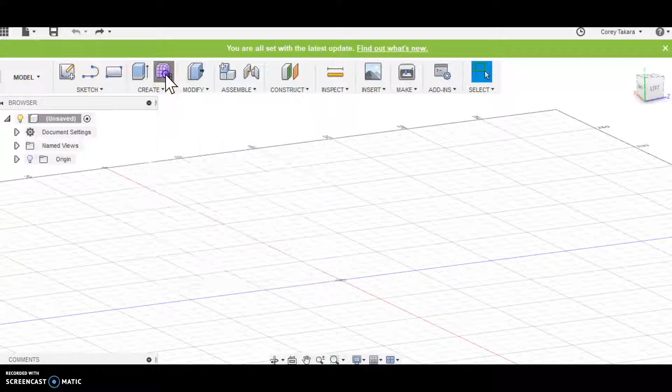Our first step is to go into create and create form, and it tells us we're entering the sculpt environment, and we say OK. And in the sculpt environment we're going to go up into create and we can choose box, plane, cylinder, sphere. There's different things we can start off with for our starting volume form. But we're going to pick box.

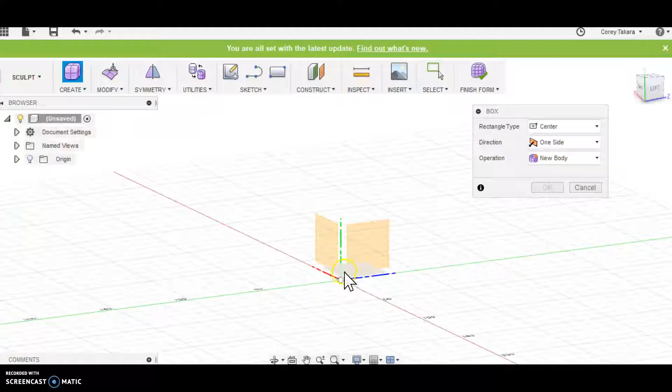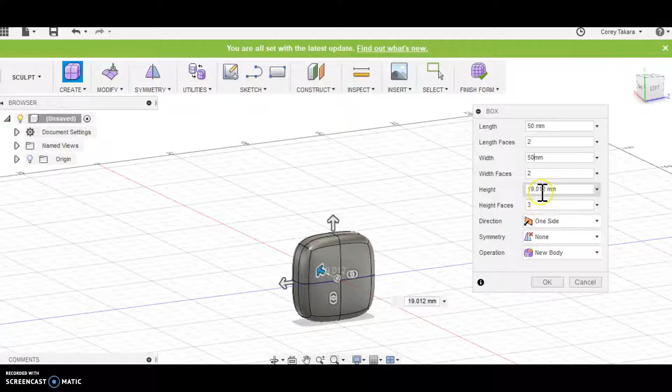And it's going to offer me 3 different planes to start from. I'm going to select the bottom plane. Actually, it looked like I selected the side plane, but that's okay. And now I have kind of this pillow-shaped form that I'm going to change the lengths on. I'm going to change the length to 50 millimeters, the width to 50, and the height also to 50.

And I'm going to give the height faces. Let's see, I'm going to give the width faces 2, the height. So you can just play around here in the box with the number of faces you have on each plane. So I'm just going to say OK.

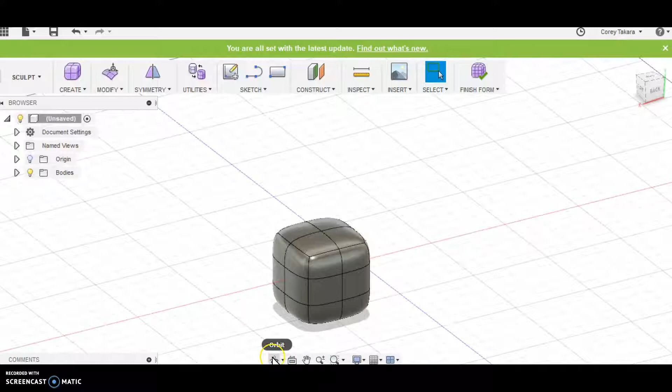All right, now I'm going to orbit, and I orbit by holding down the Shift key and pushing down on the roller ball on my mouse. If you do not have a roller ball on your mouse, you can always go down here at the bottom and select the orbit tool, and you can orbit.

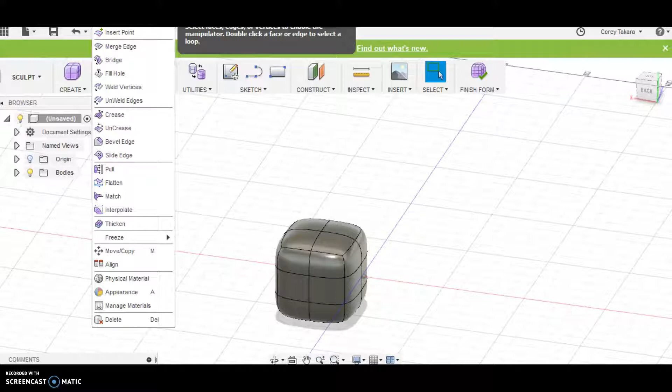The next step is we're going to distort this form and make it more organic. So I'm going to go back into modify. I'm going to click on the actual text modify. At the very top I can scroll upwards and select edit form. It doesn't show up in this screencast here. It's beyond the bounding box, but it says edit form.

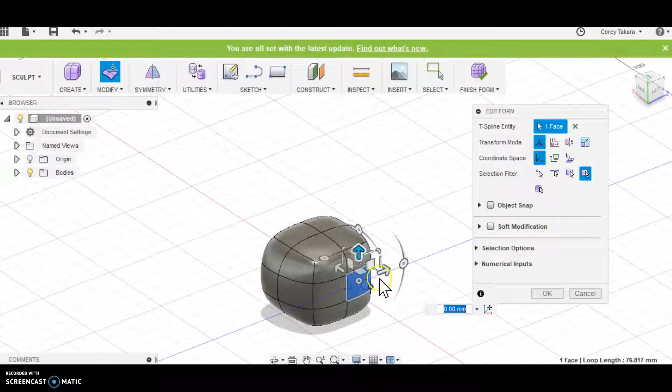And now I can select a face, and when I do that, it gives me 3 arrows. And what those arrows enable me to do is to push forward and back in the X, Y, or Z axes. So I'm going to select different faces and I'm going to push them out, and I'm going to orbit holding the Shift key while I push on the roller ball. And I can also roll outward to change my view to zoom in or zoom out.

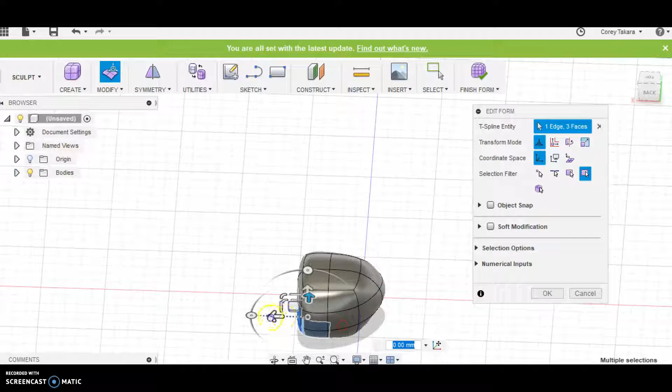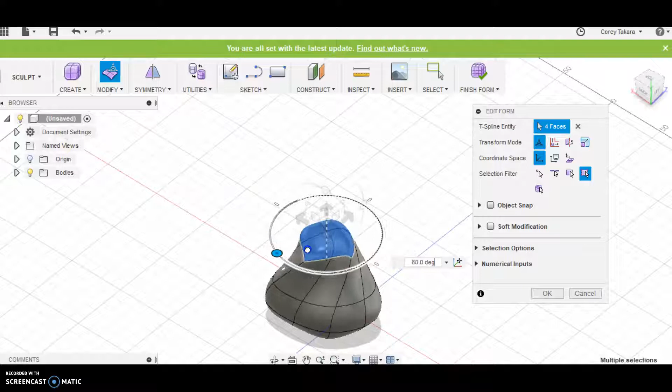So you can see this form is really distorted a lot already. I'm going to select the top 4 faces and I'm going to pull them upward. I don't know if you can see this, but there's 3 different orbital selection tools here. I can twist this sideways. Do you see how the form is twisting? That one twists it this way. I have a top one that goes in this axis, and then a third one that twists it this way.

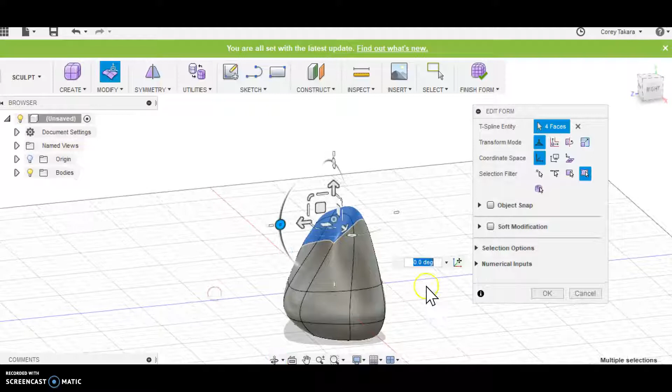All right, so I'm going to hold the Shift key and push down on the roller ball on my mouse and orbit a little bit. So you can choose to modify your design however you want. You can also add in additional faces. So let's say I select this whole band around my design. I'm going to orbit it.

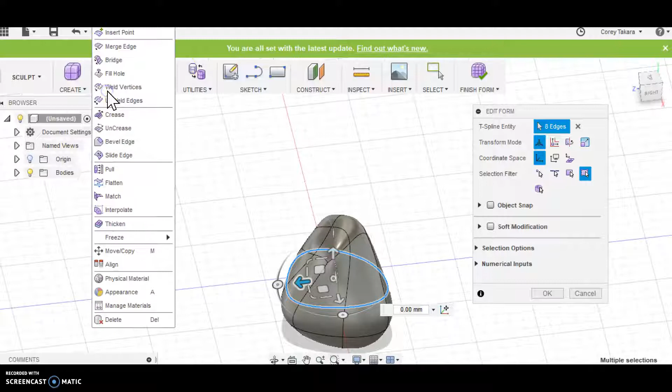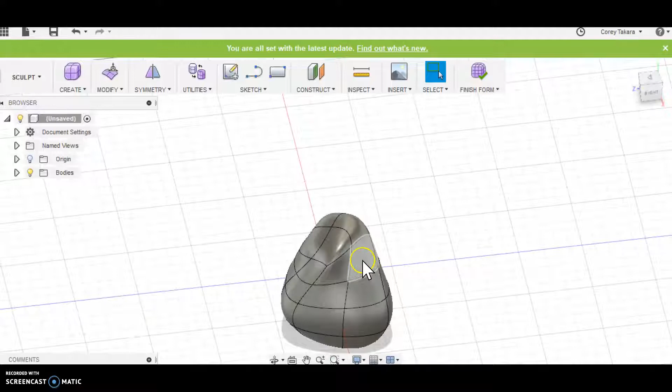I can go up into modify and say insert edge, and again I scroll upward. It's actually beyond the bounding box here, but it says insert edge, and I can choose where I add a new edge. So I'll say OK, and so now I have a little bit more granular control, and I can distort forms further. So modify, edit form. I can pull this out. So you can add edges that way.

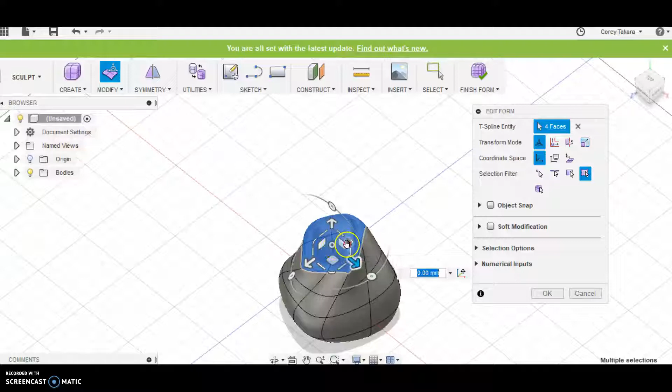So I think I like the form I have right now. And to make this a vessel, I need to just select the top 4 faces, right-click on my mouse, and select the delete function. And now my form is hollow. Okay. But it doesn't have thickness to the vessel. So I cannot 3D print it yet.

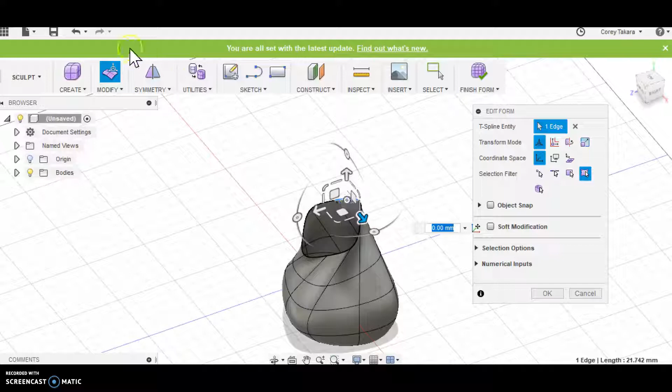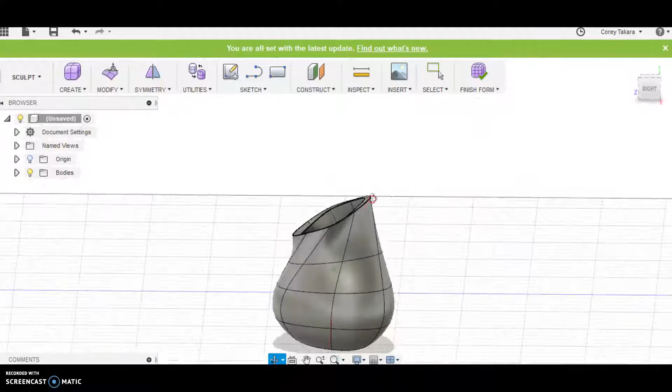In order to give it thickness, I need to go into modify and say thicken. And now I can type in how thick I want it. Do I want it 6 millimeters thick? Do I want a soft edge or sharp edge? I'm going to give it a sharp just to see what that is like. We can set the direction of the expansion. So I'm just going to say OK. And now you can see that sharp edge of the wall thickness.

Okay, let's say that this is what I want to 3D print. I need to click up here on Finish Form, and this is my finished form. To 3D print it, I need to go up to Make, select 3D Print, and I'm not going to say Send to 3D Print Utility. I'm just going to uncheck that box.

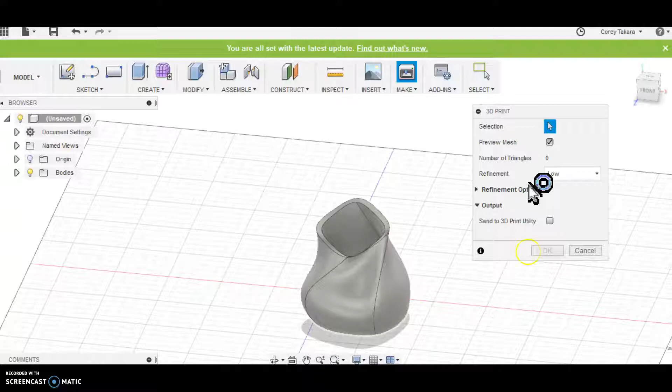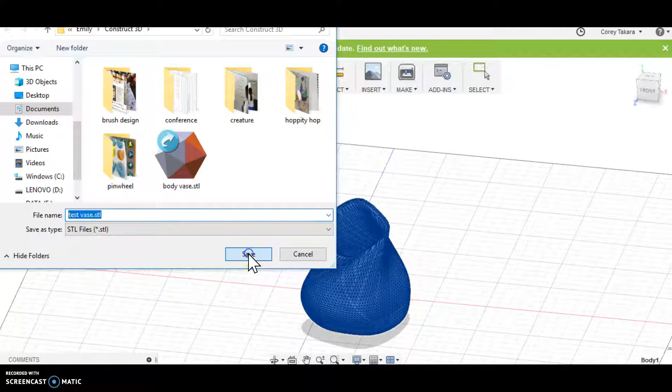I am going to select the design, so you have to select your object, and it's going to do a low mesh refinement. Now I can say OK, and up comes a window where I can give it a name and save this STL. So I'm just going to name this test vase and save it into a particular folder that would be easily accessible for printing.

And there you go. And that's how you create an organic vessel in Fusion 360, very simple, and then save it as an STL so that you can print it on your 3D printer.